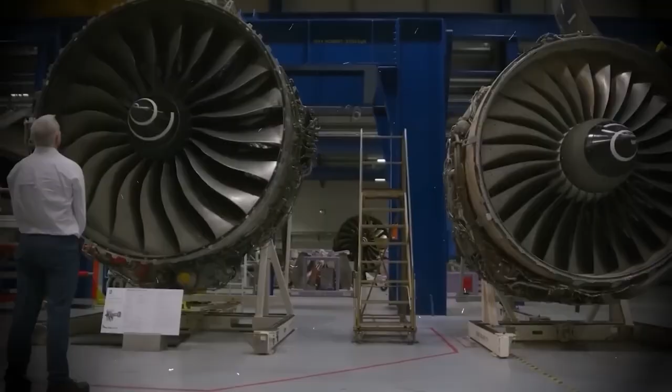Everyone thought this was the sign of a company slowly fading away, and they were completely wrong, because while the world stopped paying attention to Rolls-Royce, that was exactly when the company began the boldest project in its 120-year history. Not a minor upgrade, not a concept drawing meant to impress people, but a fully working prototype, a machine that had already been tested in the real world and had passed every test with results so shocking that the aviation industry had to sit down and read the numbers again and again just to make sure they were real.

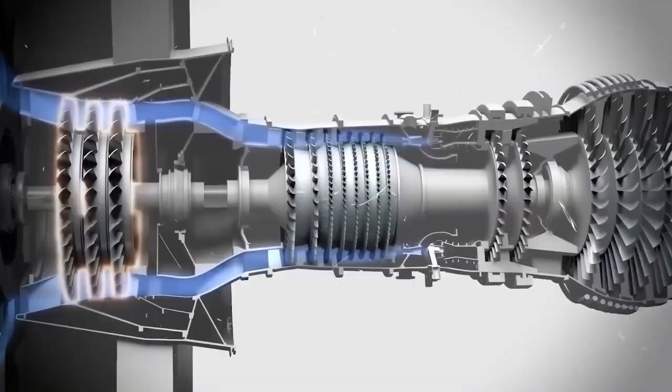They call it UltraFan, and that name was not chosen by accident. UltraFan is not just better than the previous generation of Rolls-Royce engines. It goes beyond almost everything commercial aviation has ever known. 25% better fuel efficiency, the largest fan ever fitted to a commercial aircraft engine, an advanced gearbox never before seen on an engine of this size. And most importantly, it has already been tested in real conditions with verifiable numbers, not just promises on paper.

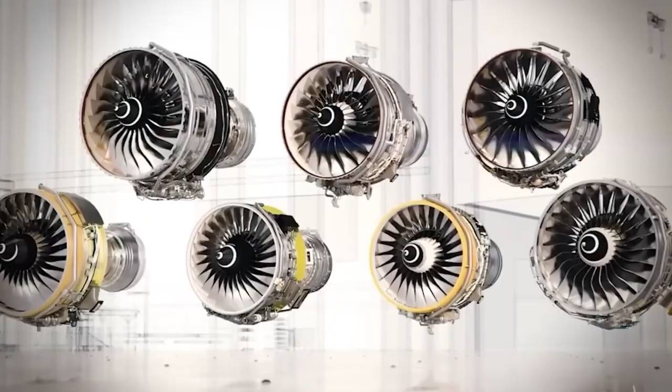But here's where the story gets really interesting. UltraFan is not just a more powerful engine, it is a strategic statement, a direct strike at the future of the entire industry. A challenge aimed straight at GE, Boeing, and anyone who ever believed Rolls-Royce was finished.

So, what is hidden inside this machine that makes it so special? Why are the world's biggest airlines watching every new move from Rolls-Royce so closely? And is this really the turning point that could completely reshape the aviation industry, or just another big promise from a brand trying to make a comeback? That is what we are going to find out in today's video.

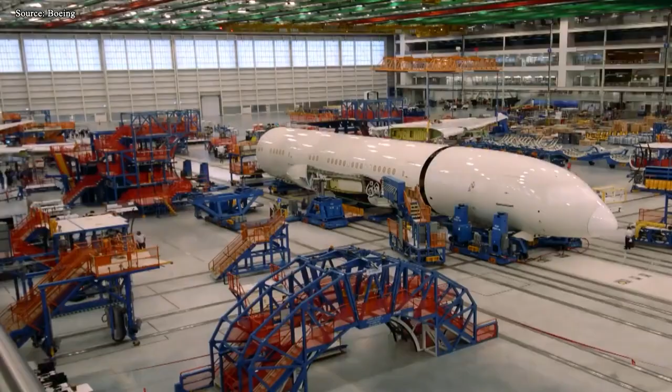In short, the entire economic structure of aviation is being shaken from the ground up. Engine technology from the previous decade, no matter how efficient it looked by the standards of its time, is becoming less and less suited to this new reality. And this is the exact gap Rolls-Royce is targeting. But to understand why that matters so much, we need to look directly at the heart of the story, the machine everyone is talking about.

What is UltraFan, and why are engineers so impressed by it? Rolls-Royce UltraFan is the result of 4 decades of accumulated research. But do not get it wrong. This is not just a step-by-step evolution of the earlier Trent family. This is a completely new design, built from the ground up with an entirely different philosophy.

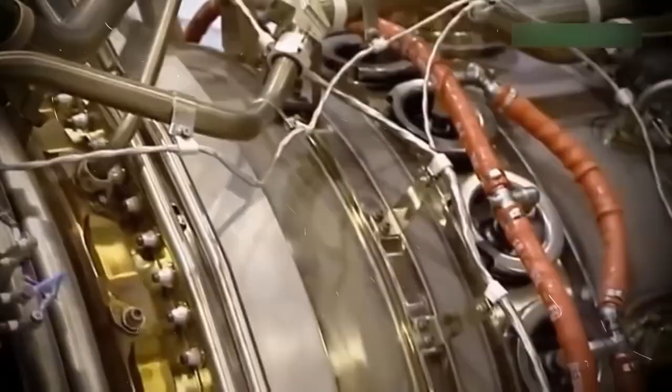Let's start with the first thing you notice, the enormous fan at the front. UltraFan's fan has a diameter of 140 inches, about 3.56 meters. It is the largest fan ever built for a commercial aircraft engine in history. But size is not the only thing that makes it special. What really matters is how it is made.

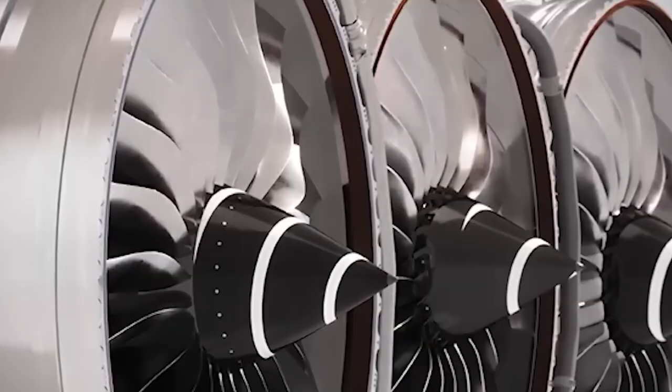Each fan blade is made from carbon composite material, which is much lighter than titanium. But to survive impact, for example, if a bird accidentally flies into the engine at high speed, the leading edge of each blade is reinforced with titanium. The result is a blade that is light, strong, and flexible enough not to shatter when something unexpected happens. In aerospace engineering, this is what people call a win-win, rare, but when it happens, it is worth paying attention to.

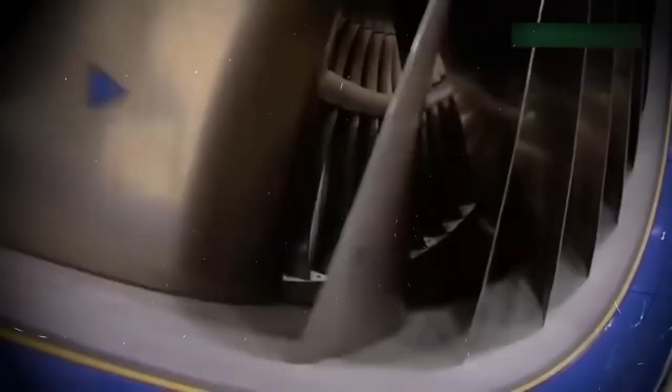Next comes the bypass ratio, a technical term, but an extremely important one. Imagine it this way. In a jet engine, not all the air passes through the engine core and gets burned. A large amount of air bypasses the core and creates thrust by being accelerated directly through the fan. That air is called bypass air. The higher the bypass ratio, the more efficient the engine becomes, and the quieter it usually is.

UltraFan reaches a bypass ratio above 15:1. That number has never been seen before in a large commercial aircraft engine. For comparison, the best modern engines today are around 9:1 or 11:1. Rolls-Royce has pushed far beyond that limit.

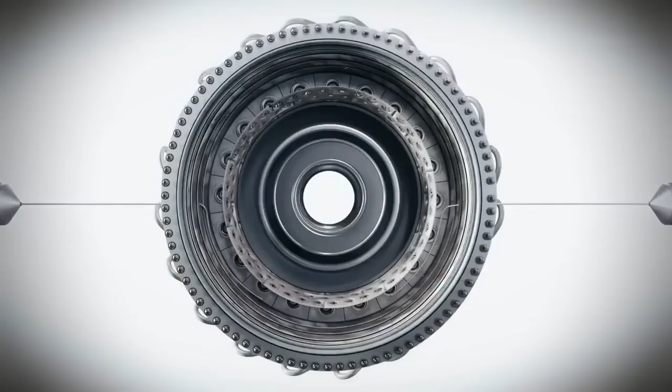But the most impressive number in this entire story is not the fan size, and it is not the bypass ratio. It is 64 megawatts. That is the amount of power UltraFan's central gearbox successfully handled during testing. 64 megawatts through a single gearbox, a world record, recorded and verified under real-world conditions. To make that easier to understand, that is roughly equivalent to the power of 85,000 standard cars being pushed through a drivetrain about the size of a small truck.

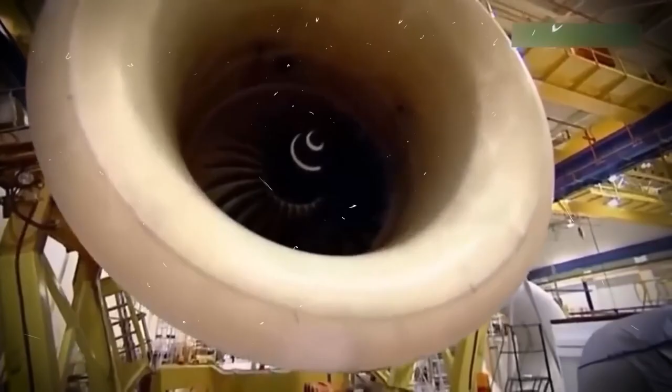This gearbox is the soul of UltraFan. It allows the fan and the turbine to spin at their own optimal speeds instead of forcing both of them to rotate at one compromised speed. It is like the difference between a car with only one gear and a car with a multi-speed automatic transmission. Efficiency improves dramatically across all flight conditions.

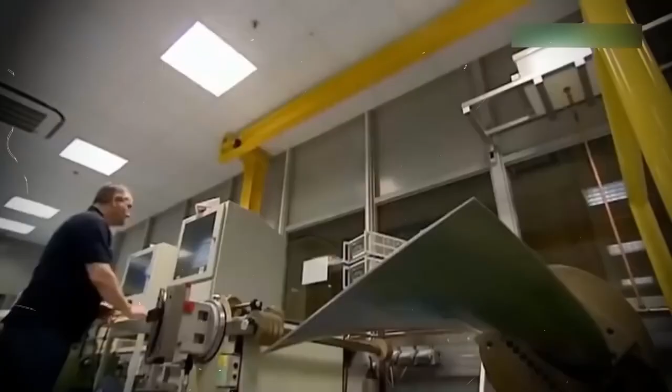And finally, inside the engine core, where temperature and pressure reach the limits of physics, Rolls-Royce uses ceramic matrix composite material, also known as CMC. This material can withstand temperatures far beyond what traditional metal alloys can handle. That means the engine core can operate at higher temperatures, produce better thermal efficiency, and reduce fuel consumption even further. CMC is also lighter and more durable over time, which helps reduce maintenance frequency.

None of this is just theory. It has been tested, it has been verified. UltraFan is a real working prototype, not just a demonstration model. At first, these may sound like interesting technical improvements, but the combination of all these technologies is what could change the entire game, and here is why.

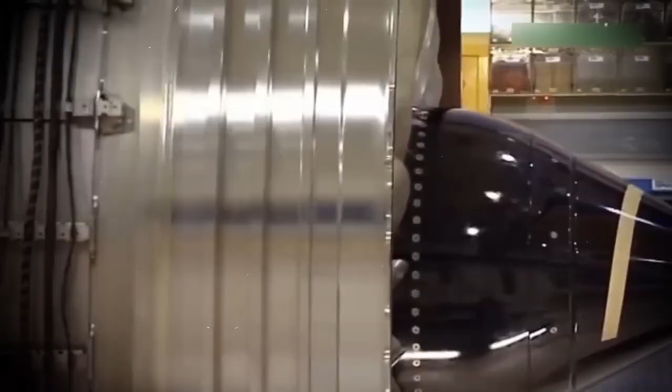The real breakthrough is not technical, it is economic. When engineers talk about UltraFan, they talk about bypass ratio and CMC. But when airline executives sit in a boardroom and ask questions about UltraFan, they only want to know one thing. Is that number real? That number is 25%.

UltraFan delivers 25% better fuel efficiency compared with the Trent XWB, currently the most efficient engine in Rolls-Royce's commercial portfolio and widely considered one of the most efficient engines in the world. This is not a comparison against an engine from 30 years ago. This is 25% better than one of the best engines available today.

Now turn that number into money. An Airbus A350 flies about 3,500 hours per year on long-haul routes. Average fuel costs for this type of aircraft are around $15 to $20 million per year, depending on fuel prices and route structure. If UltraFan reduces that cost by 25%, that means a saving of around $3.75 million to $5 million per aircraft per year.

A major airline operating 100 long-haul aircraft? Now we are talking about savings of up to $500 million a year from fuel alone, and that is only the starting point.

Ultrafan's modular design means fewer exclusive components, shorter maintenance time, and lower spare parts inventory costs. Better control of operating temperatures means less wear and tear, extending the time between major overhauls. Built-in predictive analytics can detect potential problems before they become failures, reducing expensive unscheduled maintenance, reducing canceled flights, and reducing passenger compensation.

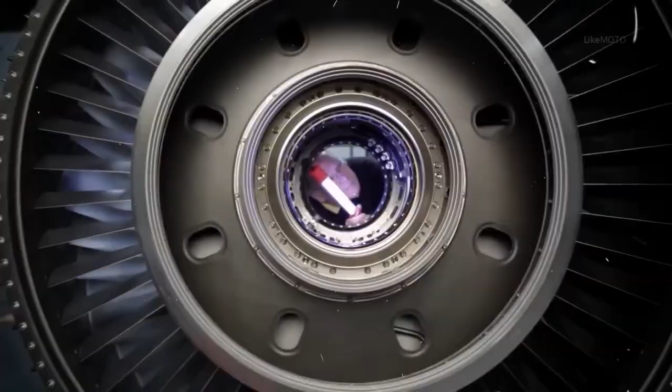Then comes carbon tax. The European Union has already started charging for carbon emissions from flights. An aircraft that burns less fuel produces fewer emissions, which means lower taxes. As this policy spreads, and current trends strongly suggest it will, more efficient engines will not just be a competitive advantage, they will become a survival requirement.

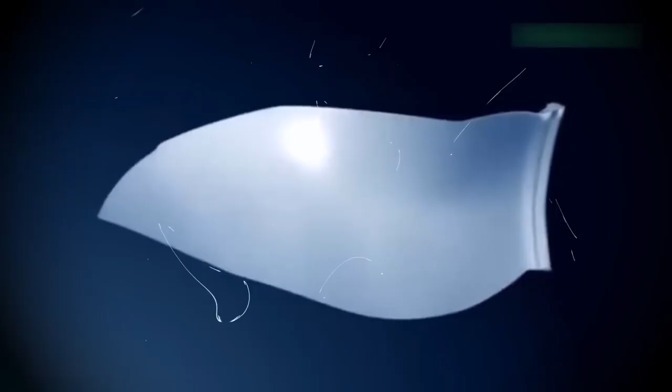And do not forget the noise factor. Airports like Amsterdam, London Heathrow, Frankfurt, and Tokyo Haneda are tightening noise restrictions. Louder aircraft lose nighttime slots. Losing nighttime slots means airlines cannot fully use the earning power of certain routes. Ultrafan, with the highest bypass ratio ever achieved and a low-speed fan design, is one of the quietest engines ever tested. That opens the door to more airports, more slots, and more revenue.

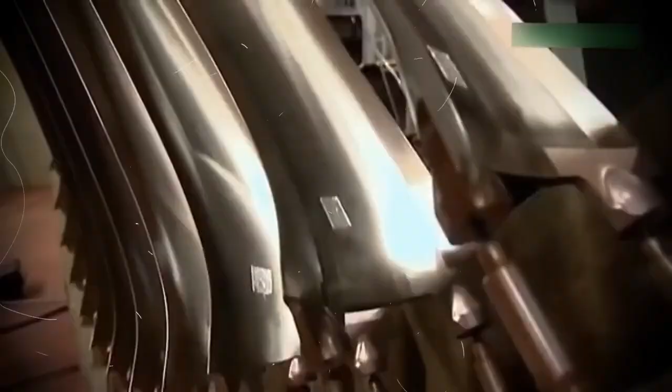When you look at the full picture, Ultrafan is not just an engineering achievement, it is a financial tool, a competitive weapon, and an insurance policy against increasingly strict regulations. Airlines understand this, and that is why the industry conversation is changing. But no matter how good a technology is, it cannot sell itself. And Rolls-Royce understands that if you want to change an industry, you need more than a superior product. You need the right alliances.

Challenges and unanswered questions. At this point, if you think this story is just unlimited praise for Rolls-Royce, we need to stop and look at reality. Because Ultrafan is still facing serious challenges, and ignoring them would not be honest. The first challenge is time. Rolls-Royce announced the Ultrafan program back in 2014. The most recent prototype testing took place in 2023, but so far, no airline has signed a direct commercial order for Ultrafan.

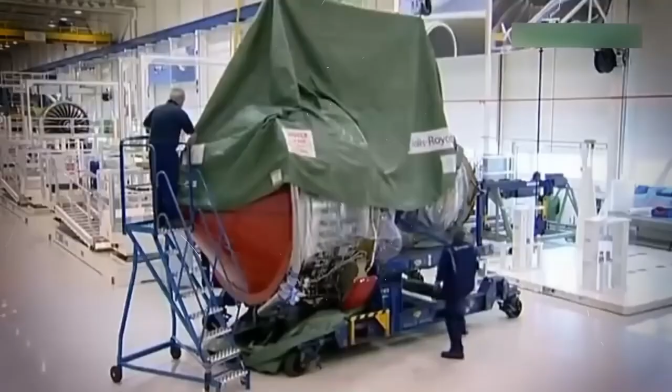In aviation, the gap between a successful working prototype and mass production can take many years, sometimes a full decade. Airbus has worked with Rolls-Royce to integrate Ultrafan into future propulsion systems, but which aircraft will use it first is still not completely clear. The next-generation airframe, the aircraft designed from day one to take full advantage of the Ultrafan architecture, has not been finalized. That means the supply chain, production facilities, and FAA and EASA certification processes are still ahead.

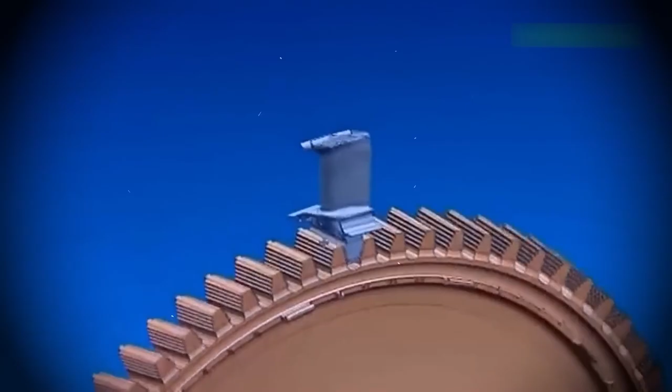The second challenge is cost. CMC, carbon composite, a 64-megawatt gearbox. These materials and components are not cheap to produce at scale. The initial price of an Ultrafan engine will most likely be significantly higher than current options. For airlines still struggling to recover after the pandemic, the upfront investment is a real barrier, even if the long-term benefits are clear.

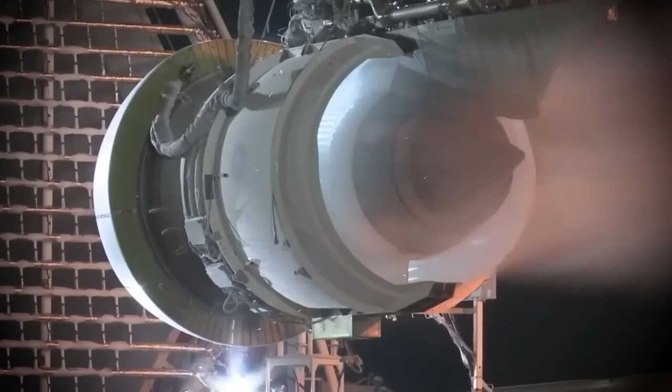The third challenge, and maybe the most subtle one, is industry inertia. Aviation is not a place that changes quickly. Every aircraft and engine purchasing decision is tied to maintenance contracts that can last 20 to 30 years. Airlines that have already invested in LEAP or GEnx fleets have no immediate reason to switch, even if something better appears on the market. Change in aviation happens by aircraft generation, not by financial quarter.

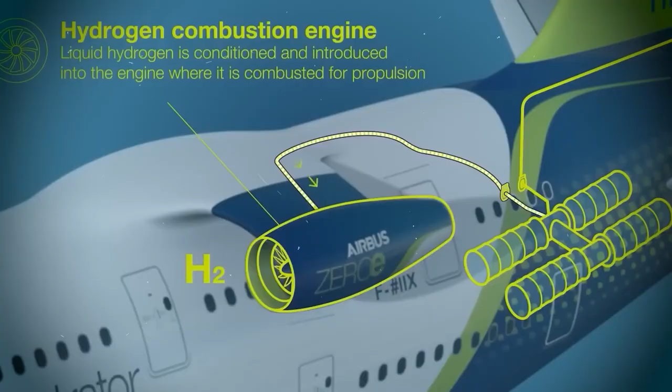And finally, there's a question no one has answered completely. Is Ultrafan truly ready for large-scale production within this decade? Prototype testing is an achievement. Producing thousands of reliable engines at a competitive cost is a completely different challenge. Rolls-Royce understands all of this, and its answer is the alliance strategy we're about to talk about now. This is where the race becomes truly intense, because Rolls-Royce is not fighting alone, and its rivals are not standing still either.

The engine war: GE9X, LEAP, and an order being overturned. To truly understand Ultrafan's position in the bigger picture, we need to look at its competitors. The strongest rival right now is the GE9X, an engine designed specifically for the Boeing 777X. The most impressive number behind the GE9X is thrust. 134,000 pounds of thrust, setting a world record. This is pure muscle, optimized for one purpose: pushing one of the world's largest aircraft into the sky with as much thrust as possible.

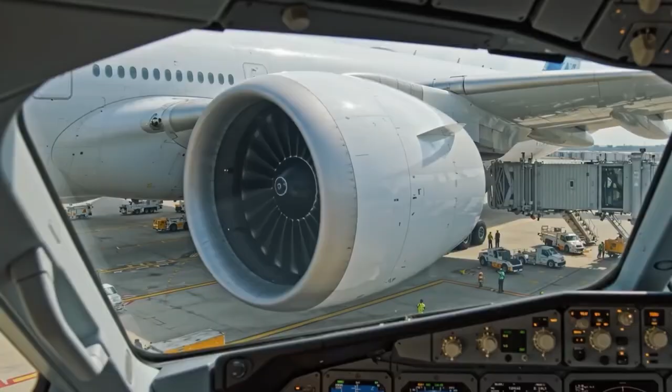But the GE9X has a structural problem that even GE cannot ignore. It is tied to a single aircraft. The 777X is the customer for the GE9X, and the 777X is years behind schedule. Commercial certification has been delayed again and again. Some airlines have cut back their orders. That means the GE9X, even though it is technically impressive, is tied to the fate of an aircraft program that is struggling.

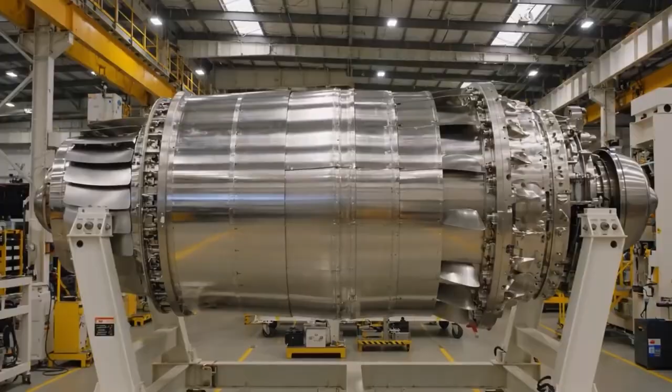The second rival is the LEAP family, a partnership between GE and Safran, used on the Boeing 737 MAX and Airbus A320neo. LEAP is selling very well, with thousands of orders. But LEAP is an engine for the current generation, not the next one. It does not have a gearbox architecture like UltraFan, and it does not have the same ability to integrate with hydrogen or hybrid electric systems. This is where Rolls-Royce's strategy becomes sharp.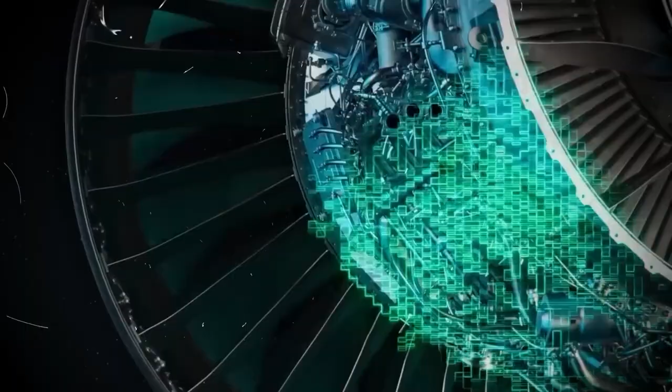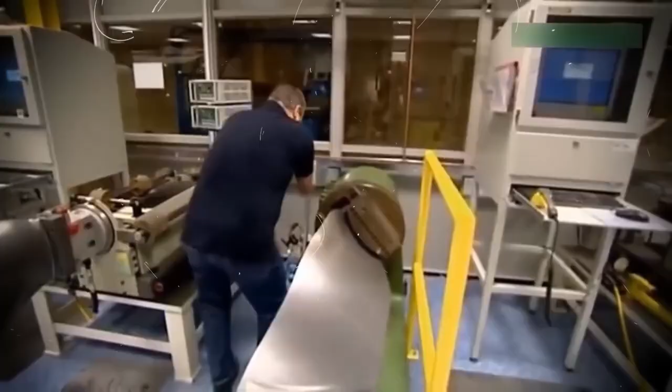In 2018, Rolls-Royce signed a partnership agreement with Airbus, co-funded by the European Union's Clean Sky 2 research program, a multi-billion euro initiative aimed at reducing aviation emissions. The goal was not simply to test UltraFan as a standalone engine, but to develop it as a complete integrated propulsion system where the engine, the mounting pylon, and the aerodynamic nacelle are designed together and optimized together instead of being developed separately. This is systems thinking, not just product thinking. And Airbus is betting on that for its next generation of aircraft.

What Boeing does not have in this equation is worth noticing. While Airbus and Rolls-Royce are building a future architecture together, Boeing is still largely relying on traditional relationships with GE and a technology roadmap that has not been clearly defined. The 777X is delayed. The 737 MAX is still recovering from crisis, and the new midsize airplane project, also known as NMA, has been frozen indefinitely.

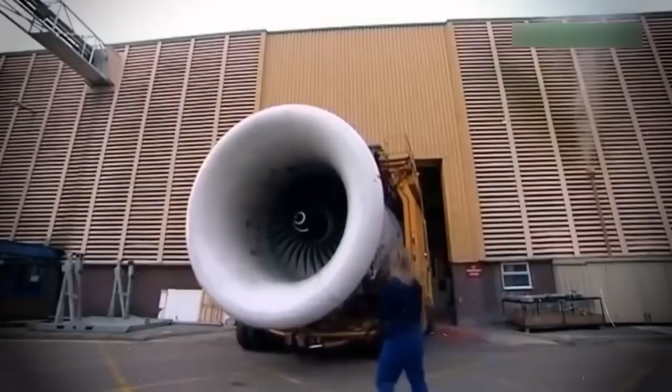But to be fair, GE is not sitting still. It is developing the CFM RISE engine family, Revolutionary Innovation for Sustainable Engines, together with Safran, targeting a 20% efficiency improvement over LEAP. That program is also testing an open fan architecture, an even more radical design that could challenge UltraFan's fuel efficiency in the future. So this is not a simple two-sided race. It is a multi-dimensional competition, and no one can say for sure who will reach the next generation finish line first.

So in the end, the biggest question remains. In such a fierce competitive landscape, does UltraFan have enough power to create real change, or is it just another name in an already crowded race? The future is being written by decisions made today.

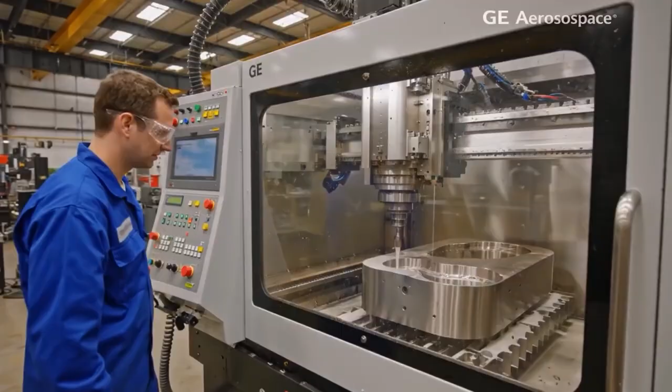Now let's look ahead. Not next year, but 10 to 20 years from now. By 2035, analysts expect most major economies to have mandatory carbon pricing systems directly applied to aviation. In some regions, this is already happening. Once carbon costs become a fixed part of every airline's financial calculations, engines that burn less fuel are no longer just nice to have. They become necessary to protect profit margins.

Sustainable aviation fuel, or SAF, is already being deployed, but it is still more expensive than conventional jet fuel. However, as SAF production scales up and costs come down, engines that are compatible with 100% SAF, like UltraFan is designed to be from the beginning, will become the natural choice. No major adjustment, no need for recertification.

Further ahead is hydrogen. Airbus has announced its ZEROe program, targeting commercial hydrogen aircraft by the year 2035. Rolls-Royce, through UltraFan's modular architecture, has designed this system to be compatible with future hydrogen combustion. That does not mean UltraFan will fly on hydrogen tomorrow, but it does mean the architecture is ready to evolve when hydrogen storage technology becomes mature enough.

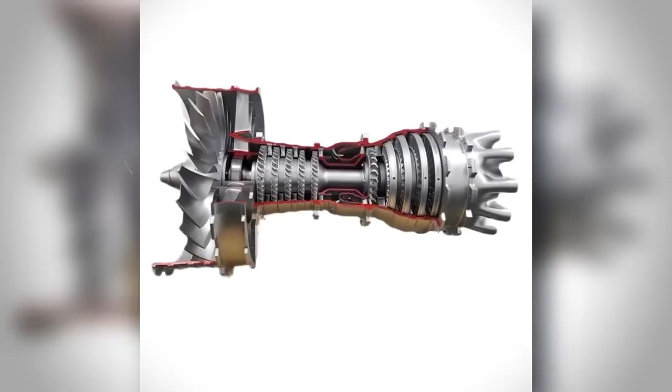And here's the deepest strategic point in the entire story. UltraFan is not just a product, it is a platform. Its modular architecture allows the same basic core to be adapted for different thrust levels, from narrow-body aircraft like the A320 family to wide-body aircraft like the A350 and future models. That means an airline could operate multiple aircraft types with the same technical system, the same maintenance team, and the same spare parts inventory. This is what fleet planners call fleet commonality, and it can save major airlines tens of millions of dollars every year.

For consumers, the impact is not small either. Quieter and more efficient aircraft with lower operating costs eventually mean airlines can keep ticket prices more competitive as operating expenses rise. Long-haul routes to smaller airports, which used to be economically difficult, could become realistic with an engine this fuel efficient.

For the entire industrial ecosystem, UltraFan sets a new benchmark. GE will have to accelerate CFM RISE. Pratt & Whitney will have to rethink its GTF roadmap. Safran will have to find a way to close the modularity gap. The entire race will speed up, and in the end, that is good for everyone. Rolls-Royce is not just building an engine, it is building leverage to change the rules of the entire industry.

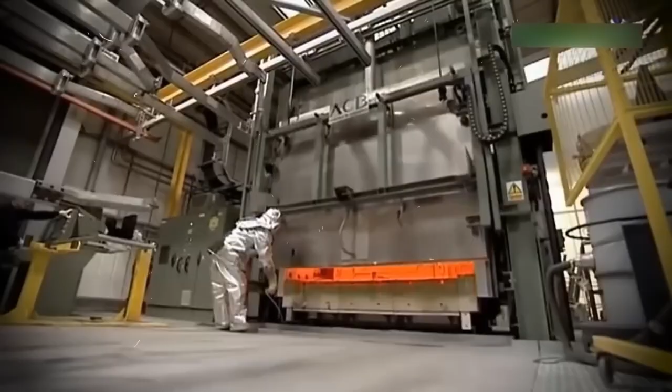Looking back at this whole story, one thing becomes clearer than ever. This is not a story about an aircraft engine. This is a story about what happens when an old and established organization decides not to compete under the old rules, but to sit down and rewrite the rules. Rolls-Royce, during the years when it seemed the quietest, did exactly that. It did not try to regain market share by making something slightly better than what already existed. It made a bet that the future of aviation would not be defined by who has the strongest engine, but by who has the most flexible, efficient, and sustainable ecosystem.

And with UltraFan, that argument is starting to carry real weight. But, and this is important to remember, the future has not been fully written yet. UltraFan still needs full certification. Large-scale production is still an unknown. Airbus needs to decide exactly which aircraft will become the first home for this engine.

GE is striking back with CFM Rise. And the market, as history has shown again and again, does not always reward the best technology. Sometimes it rewards the one that arrives at the right time, with the right partner, at exactly the right moment. Rolls-Royce is trying to be all three at once.

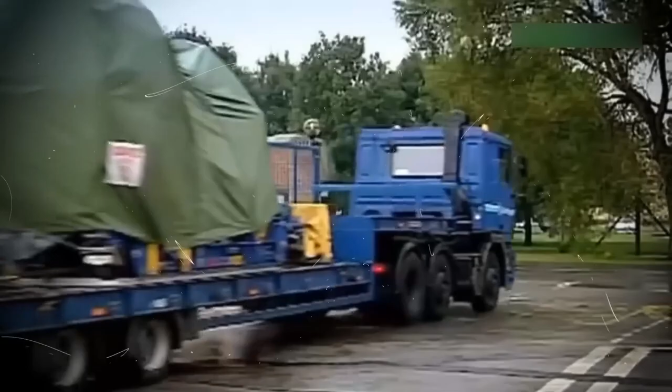So the final question, and maybe the most important one, is not, is UltraFan the best engine in the world? The technical numbers already give us a pretty clear answer to that. The real question is, is the aviation industry ready to change fast enough to embrace it?

And over the next decade, the answer to that question could reshape everything from airline balance sheets to the ticket prices you pay, to the amount of carbon released into the atmosphere every time an aircraft leaves the runway. This is one of the most important races in modern industrial history, and it is happening right now, almost completely under the public radar.

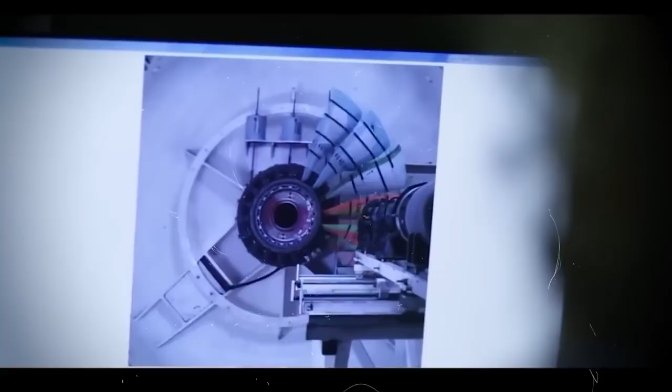So, what do you think? Is UltraFan truly a turning point, or will aviation keep being held back by the inertia of old contracts and legacy systems? Rolls-Royce has already started the journey, but will it actually reach the finish line?

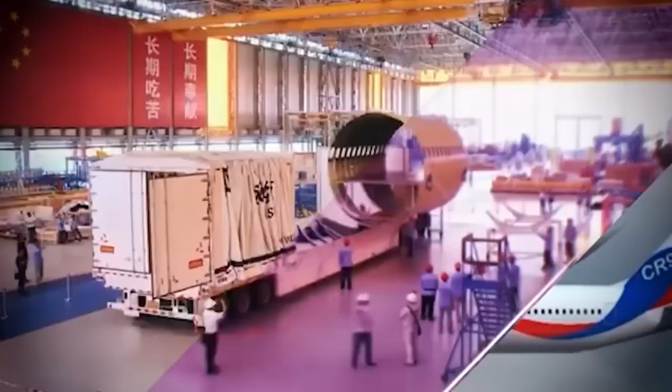Have you ever wondered what would happen if one night you woke up and everything you had always believed was untouchable in the global commercial aviation industry suddenly started falling apart? Not because of an accident, not because of a financial crisis, but because of one aircraft, an aircraft that much of the Western world once treated like a joke, had just completed a 12,000-kilometer journey without a single incident.

That aircraft is China's C-929, and that test flight did not come with fireworks, a massive press conference, Hollywood celebrities, or some dramatic countdown. It was just one airplane taking off quietly and landing in a completely different world.

For decades, people believed that the long-haul, wide-body aircraft market, the kind of aircraft that flies from New York to Tokyo, from Los Angeles to Dubai, belonged to only two giants, Boeing and Airbus. Nobody could touch that territory. The research costs were too massive, engine technology was too complicated, the international certification process was too long. But everything is changing, and it is changing much faster than most people expected.

So what allowed a country that once depended almost completely on Western engines to design, build, and test fly a world-class long-range aircraft on its own? Is this really an existential threat to Boeing, or is it just a geopolitical show? And most importantly, if the C-929 receives commercial flight certification, what will the global aviation market look like? Let's find out together.

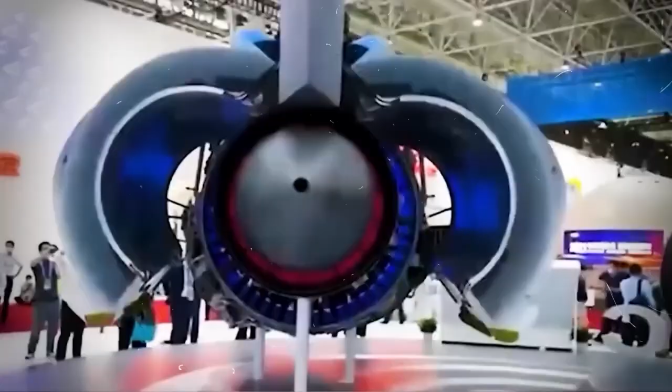Every major airline in the world, from Delta, United and American Airlines to Emirates, Singapore Airlines, and Cathay Pacific, has had to choose between those two options. There was no third choice. And the reason is simple. Building a wide-body aircraft is not a normal engineering project.

It requires tens of billions of dollars in research and development, advanced composite material technology, specialized engine systems, and most importantly, trust from international aviation certification agencies like the FAA in the United States or EASA in Europe. Even advanced economies like Japan have failed.

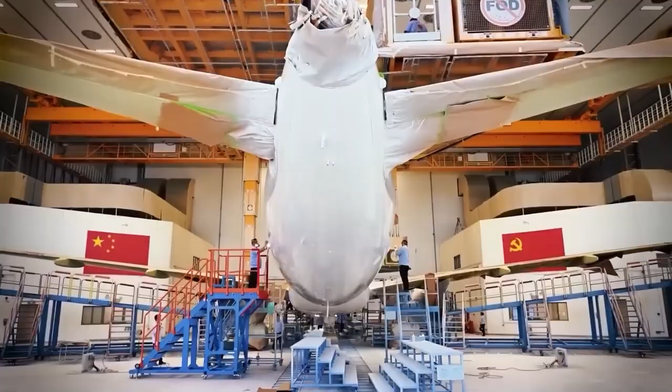Mitsubishi SpaceJet, a project that took decades and billions of dollars in investment, was finally canceled in 2023 without ever completing commercial certification. Canada's Bombardier had to sell its C-Series aircraft business to Airbus. Brazil's Embraer has only been able to focus on short-range and medium-range aircraft.

Long-haul, wide-body aircraft, that was untouchable territory. Or at least, that is what people used to think. The Boeing 787 Dreamliner and the Airbus A350 are the two symbols that dominate that segment.

They can fly non-stop from the east coast of the United States to Asia, carry 250 to 350 passengers, burn up to 25% less fuel than the previous generation, and offer cabins comfortable enough for passengers to survive 14 to 16 hours in the air.

But even those high points have cracks. Boeing is struggling with a production quality crisis. FAA investigations after the 737 MAX crashes and the Alaska Airlines door plug blowout incident in early 2024 threw both Boeing's brand and its supply chain into chaos. Deliveries slowed down, costs climbed, and customer trust started to fracture. That is the backdrop. And in that backdrop, China made its move.

But to understand why this matters so much, we need to look at the core of the whole story, the story of how a broken alliance became the catalyst for one of the most ambitious aviation projects in history. The C-929 rose from the ashes of the CR-929. The year was 2016. While the world was watching Boeing roll out new 787 aircraft and Airbus expand its A350 production line, a signed document in Shanghai quietly laid the foundation for a revolution. China and Russia announced a partnership to develop a wide-body aircraft called the CR-929.

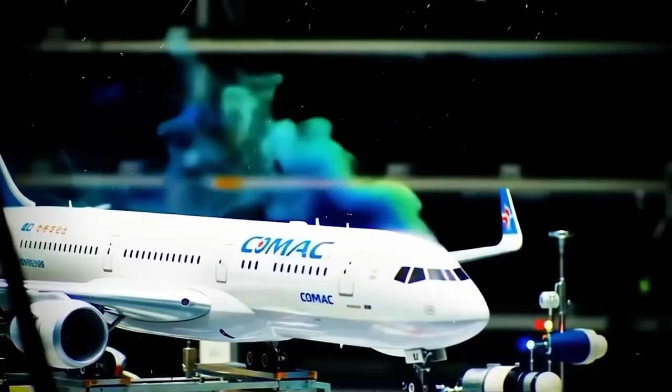The West paid attention. Boeing released an internal memo warning about threats from non-traditional players. Honeywell, GE, Safran, Western aviation suppliers quietly watched the project. Then, everything collapsed. In 2022, the war in Ukraine broke out. Western sanctions tightened around Russia like a noose. UAC was forced to focus its resources on military platforms. Key engineers were pulled away from the CR-929 project. Progress stalled. Emails went unanswered.

Parts stopped arriving. But the real breaking point did not come from politics, it came from power. China wanted access to Russia's proprietary engine technology, including advanced high-bypass fan designs. Russia refused. Intellectual property negotiations broke down. By the end of 2022, Russia pulled out of the project. The West breathed a sigh of relief. Aviation experts wrote obituaries for the CR-929, a victim of geopolitics, they said. Dead before it was born, aviation headlines declared. But nobody saw what was coming next.

China did not bury the project. It renamed it. The CR-929 became the C-929, and instead of scaling back, COMAC accelerated. They hired more people, poured in more money, and started replacing foreign components one by one with domestic solutions. Avionics systems were swapped out, the fuselage design was rebuilt from the ground up, the certification process was restructured to align with international protocols through the Civil Aviation Administration of China, the CAAC.

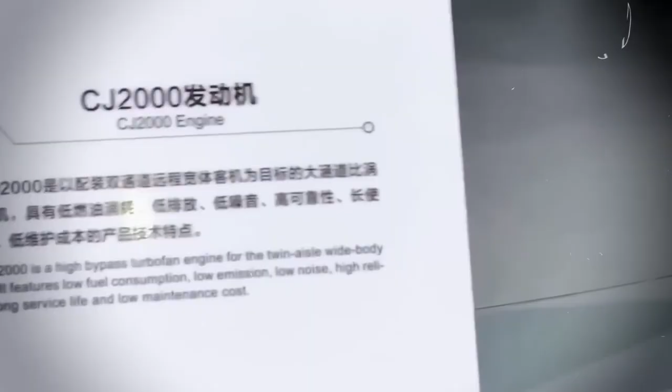By the end of 2023, the first flight test model was ready. That may sound simple, but this small detail could change the entire game. China is not just building an aircraft, it is building a completely independent aviation ecosystem. What is inside the C929 that has the whole industry worried? This is not just a stretched-out C919. This is not a cheap copy of the Dreamliner. The C929 is a completely new wide-body design built to compete directly with the Boeing 787 and the Airbus A350, not just in size, but also in technology, passenger comfort, and total operating cost.

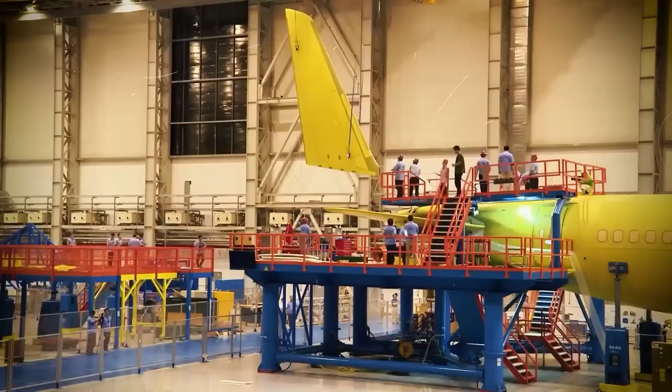Look at the numbers. The C929's wingspan stretches close to 65 meters, longer than the Dreamliner. Its cabin is more than 5.5 meters wide, giving airlines flexibility in seating layouts, from 9 abreast economy seating to premium business class cabins optimized for long-haul routes. But size is not the biggest headline. The materials are what make the whole industry look twice. More than 50% of the C929's airframe is made from carbon fiber composite materials, a dramatic leap from COMAC's earlier aircraft, and even slightly ahead of the A350. On top of that, about 15% titanium is used in key load-bearing areas. The result is an aircraft optimized for fuel efficiency, corrosion resistance, and durability on ultra-long-haul routes.

Inside that shell, things get even more interesting. The C929 is expected to feature intelligent avionics with adaptive digital flight displays, ambient cockpit lighting to reduce pilot stress, and a real-time system monitoring suite similar to what the Boeing 787 pioneered, but rumored to include expanded diagnostic bandwidth across hydraulic, electrical, and thermal systems. Translated into business language, airlines could get predictive maintenance capability and reduced unplanned downtime, two of the most painful cost problems in modern fleets. Then comes the cabin, and here, COMAC is not holding back.

Designers have focused heavily on the passenger experience, integrating noise reduction materials, adaptive LED lighting, and modular seating options. Leaked drawings show larger windows, wider aisles, and an interior layout inspired by the minimalist design of the A350 combined with Embraer-style ergonomic seat spacing.

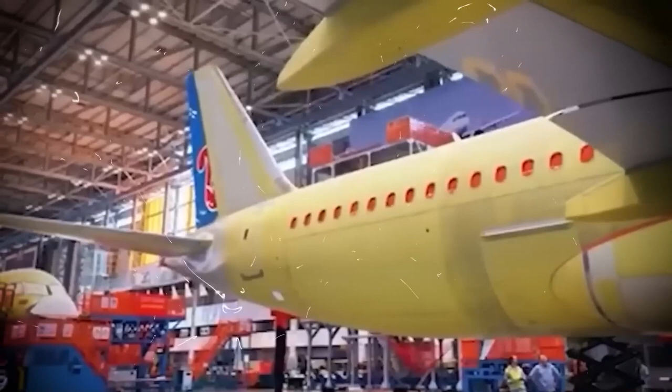And here is what makes all of this scary for Boeing and Airbus. This whole package of innovation is being offered at an estimated cost 15 to 20% lower than comparable Western products, especially for markets connected to the Belt and Road Initiative. This is not just an engineering win, it is an economic weapon.

There's one more detail people do not talk about enough. Final assembly takes place inside the Shanghai Pilot-Free Trade Zone, a facility that is both a production line and a geopolitical firewall. The zone gives Comac tax exemptions, faster import and export clearance, and most importantly, full control over data and intellectual property. No Western company can simply walk in and observe.

International oversight is minimal. The assembly line is embedded with Chinese-developed robotics rumored to include AI-assisted inspection systems that scan composite panels in real time for micro cracks and fatigue stress. Unlike Boeing's Everett factory, which depends heavily on legacy systems and layered outsourcing, Comac's production line is vertically integrated, fewer third parties, more in-house control.

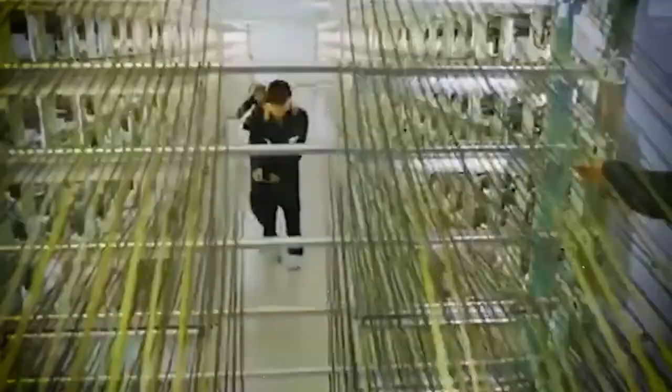One engineer from the Shanghai Aircraft Design and Research Institute, speaking anonymously, described the philosophy clearly. We learned from the Dreamliner delays. Every failure Boeing suffered, we studied and adapted. But no matter how impressive the technology looks, it means nothing if it cannot be produced at scale and if it does not have the heart to fly on its own. What the C929 still has not proven.

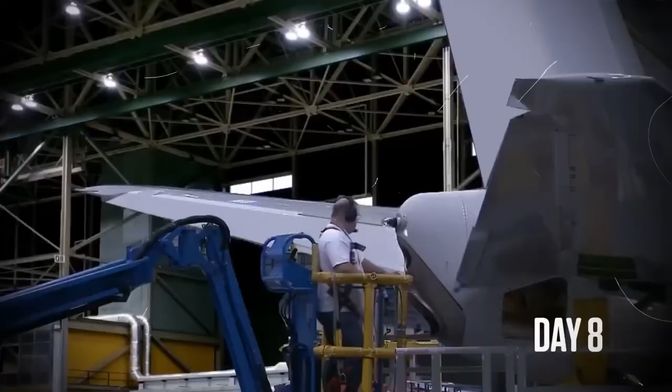But let's slow down for a second, because this story would not be honest if it were all sunshine. The C929 still faces enormous challenges, and the biggest one is something China has struggled with for decades: engines. Let's be direct. Engines have always been China's weak point. The C919, the narrow-body aircraft that Comac spent more than 15 years perfecting, still depends on the LEAP-1C engine, a product co-developed by General Electric and France's Safran.

That is exactly the kind of dependence that allows the United States to control access, restrict exports, and even delay certification progress. With the C929, China's trying to break that grip through the CJ2000 engine, a next-generation turbofan being developed by the Aero Engine Corporation of China, or AECC. According to insiders at AECC, the CJ2000 is designed to deliver up to 35 tons of thrust, putting it directly in the performance class of the Rolls-Royce Trent 1000 and GE GEnx, both of which power the Boeing 787.

On paper, the specifications sound impressive. A 3-meter fan diameter, an ultra-high bypass ratio for fuel savings, next-generation ceramic matrix composite materials to handle high turbine temperatures at a lower weight. But here is the reality. The CJ2000 is still in development.

Bench testing has started. Early prototypes of fan blades and compressor stages are reportedly showing efficiency indicators within 10% of GE's newest models. But within 10% in the jet engine business is not success, it is the starting line. A 10% efficiency gap can translate into millions of dollars in operating costs every year for each aircraft.

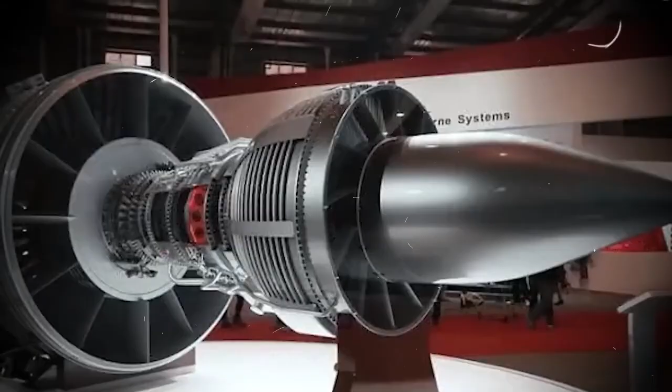Then there is the international certification problem. Even if China's CAAC certifies the C929 for domestic flights, the question is whether the FAA and EASA will certify it for international operations. And if they do not, then the C929 can only fly on routes where Chinese regulators have influence, which basically means China's domestic market and Belt and Road-aligned countries. That still sounds like a huge market, and it is. But it is not the kind of global domination some claims are suggesting.

And finally, there's the issue of passenger trust. The international aviation market does not buy aircraft based only on specifications. It buys based on safety records, after-sales service capability, and spare parts availability. COMAC has still not built a global service network that can compare with Boeing or Airbus. That is a massive commercial challenge that cannot be solved with state funding alone.

And this is where the race becomes even more intense, because this company is not the only one trying to dominate the future of the sky. Boeing, Airbus, and the C929. Who is really where? Let's put these three aircraft side by side and look straight at the truth. The Boeing 787 Dreamliner is still the gold standard of the wide-body segment.

It has a massive operating record, more than 1,000 aircraft in service around the world. Its after-sales service network reaches across 140 countries. Its systems integration technology has been proven through millions of commercial flight hours.

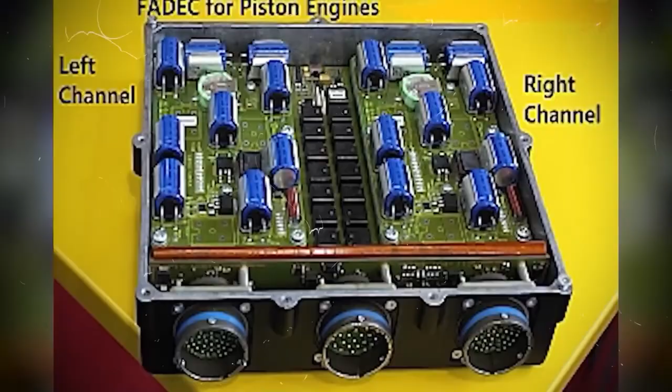The gap is widening. The Airbus A350 is seen as the smarter compromise. Excellent fuel efficiency, a spotless safety record, and Airbus's political flexibility as a European company less tied to United States-China trade disputes makes it more attractive to many airlines in emerging markets. But Airbus is not free from pressure either. Its supply chain is stretched, and it cannot ramp up production fast enough to meet post-pandemic demand recovery.

So what does the C929 look like in that context? If China really delivers what it is promising, a long-range, wide-body aircraft with 50% composite materials, total lifecycle cost 20% lower, and built-in state-backed financing, then this is not just a competitor. This is a structural alternative, but here's the important balance point. The C929 and the Boeing 787 may never compete directly in the same market. Not because the C929 is not good enough, but because the two aircraft may serve two different ecosystems.

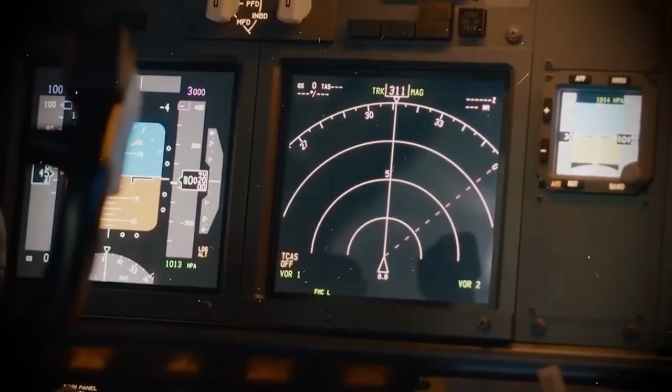Boeing continues to dominate North America, Western Europe, Japan, and South Korea, markets where FAA and EASA standards are the gold standard. The C929 could capture the rest of the world, Southeast Asia, South Asia, the Middle East, Africa, and Latin America, where infrastructure is still being built and purchasing decisions are less tied to Western geopolitics. And that is exactly what makes this competition not just an aircraft battle, but a systems war.

Imagine this scenario. A developing country receives a loan from a Chinese state bank to build a new airport terminal. The construction is handled by a Chinese contractor. The radar and air traffic control systems come from Huawei's Aviation division. And when it is time to bring in aircraft to fill those new runways, the airplane parked on the tarmac is the C929, purchased with Chinese state financing and bundled with below-market service packages.

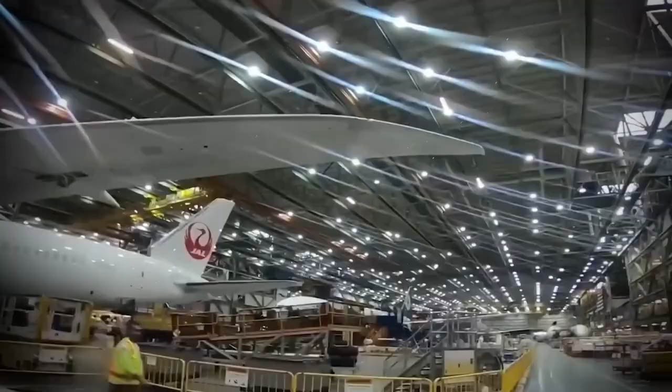That is not just an aircraft purchase. That is the creation of a strategic partnership poured in concrete and steel. And once that infrastructure is built, it is very hard to reverse. Internal reports from Beijing's Ministry of Commerce show that at least 8 countries, including Pakistan, Kenya, and Malaysia, have expressed early interest in buying or leasing C929 units once certification is complete.

So in the end, the biggest question remains: is this technology truly powerful enough to change the future of the sky? Let's move to the next part. What will the aviation world look like over the next 10 years? This is the part everybody wants to know, but few people are willing to say out loud. Let's start with the most likely scenario over the next 5 years.

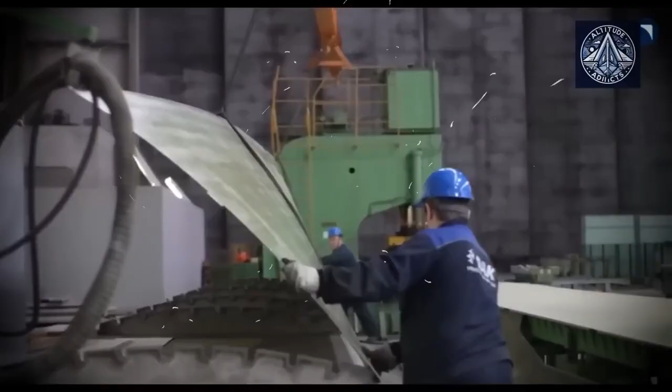If the CJ2000 falls behind schedule, which is entirely possible based on the history of commercial jet engine development, then the C929 will enter commercial service with a foreign or temporary engine, just like the C919 is currently using the LEAP-1C. That would significantly limit China's claim of being fully independent and give the West important leverage, but it would not stop the launch. Even in that scenario, the C929 could still create meaningful disruption in markets that do not require FAA certification. Southeast Asia, where ASEAN is one of the fastest-growing aviation markets in the world, could be the first battlefield.

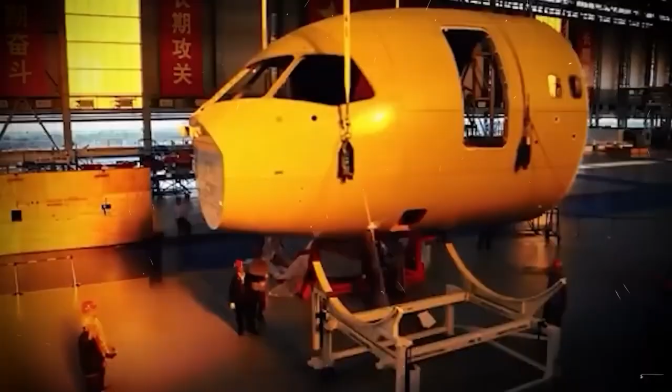Looking further ahead to 2030 through 2035, if China executes its roadmap, the CJ2000 gets certified, the C929 receives CAAC certification, and then begins seeking recognition from Asian and African regulators, the global picture will start changing in more fundamental ways. Boeing would see its market share shrink in the Asia-Pacific region. Airbus may hold its position in Europe and the Middle East thanks to diplomatic advantages, but it would still face pricing pressure. And airlines in emerging markets, which have long had to accept whatever Boeing or Airbus offered because there was no other real option, would suddenly have a genuine third choice.

But the impact does not stop with aircraft. If the C929 succeeds, it will create the next wave. The CJ2000 engine, if certified, would open the door to dozens of other applications. China's carbon fiber composite supply chain would grow to the point where it could compete with Japan's Toray and America's Hexcel, currently 2 of the largest aerospace composite material suppliers in the world.

The accumulated knowledge from the C-929 would be applied to the next generation of aircraft. And here is the most important part for viewers watching from the United States. This competition does not just mean plane tickets might become cheaper. It means the balance of power in global aviation, an industry worth nearly $1 trillion, is starting to shift. And when aviation power shifts, it pulls commercial power, diplomatic influence, and ultimately geopolitics along with it.

That is why a 12,000-kilometer test flight with no fireworks and no Hollywood-style launch matters more than any show. Because it is not a promise, it is proof, and proof changes everything. As for Boeing, the company is in one of the most difficult moments in its history. New CEO Kelly Ortberg is taking over a ship under pressure from every side: the FAA, airline customers, investors, and now a new competitor from the East. This is not a good moment to be weak while facing a strategic challenge on the scale of the C-929.

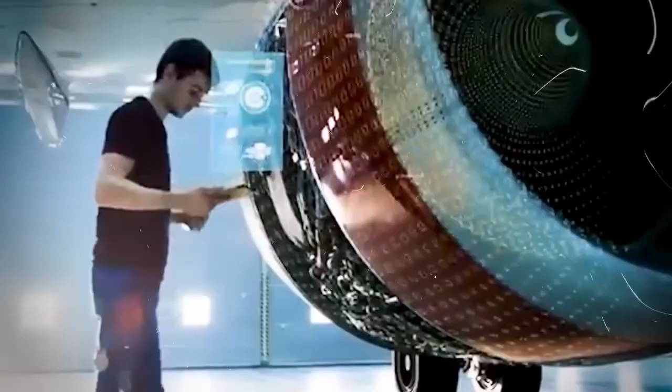One Western analyst summed it up very clearly. If the C-929 gets certified and reaches even moderate fuel efficiency, Boeing's dominance in the Asia-Pacific will end. Airbus has more diplomatic advantage, but even Airbus cannot compete with a $150 million aircraft that comes bundled with an airport upgrade package and 20-year financing. So where do we stand in this bigger story?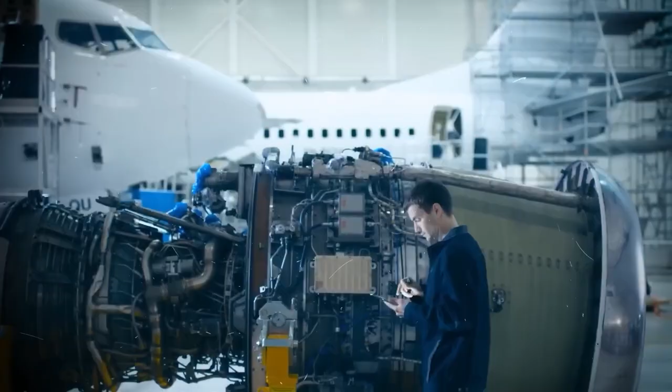The C-929 is not a silver bullet. It still has many challenges to overcome: the engine is not ready, international certification is uncertain, and the after-sales service network is not mature enough. Anyone who thinks Boeing and Airbus will collapse after one 12,000-kilometer test flight does not understand how the commercial aviation industry works. But this is clearer than ever. The race has begun, and this time, there is a real challenger.

China has proven something many people once doubted, that a country can build a long-haul wide-body aircraft without Western permission. That changes the psychology of the entire industry. And in business, psychology often leads reality. The question is no longer whether the C-929 can fly. The question now is, who will sit on it, who will operate it, and who will shape the rules of the sky over the next 30 years? That is the question Boeing, Airbus, Washington, Brussels, and Beijing are all trying to answer, and nobody is completely sure.

What do you think? Is the C-929 really an existential threat to Boeing, or is it just an important geopolitical step that still is not enough to flip the whole game?

But in early 2025, a technical report landed on the desks of analysts in Europe and the United States. And according to people familiar with the situation, the reaction inside companies like Boeing and Airbus was anything but calm. Because this was not some symbolic test. It was the clearest signal yet that China, through an engine called the CJ1000A, may be much further ahead than the world once believed. So, where does the CJ1000A really stand in this race? And if it succeeds, what could it change in the balance of power across the global aviation industry?

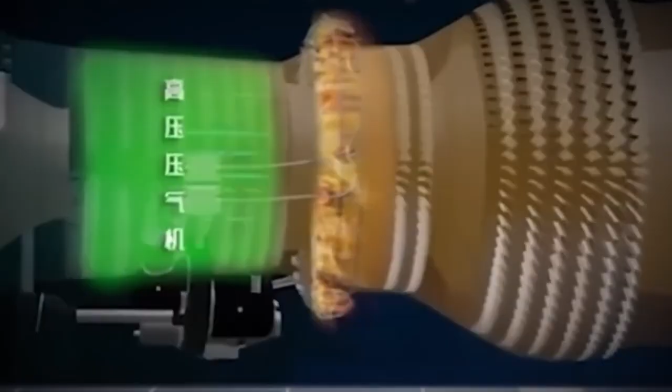To understand why this engine matters so much, you have to look back at the dangerous gap China has been forced to live with for years. China built the C-919, its first domestically developed narrow-body airliner and a direct rival to the Airbus A320neo and Boeing 737 MAX. That alone was a major engineering achievement. But there was one detail Chinese officials were never comfortable talking about. Every C-919 flying today depends on the LEAP-1C engine, a joint product of America's GE Aviation and France's Safran, a made-in-China airplane powered by a foreign heart.

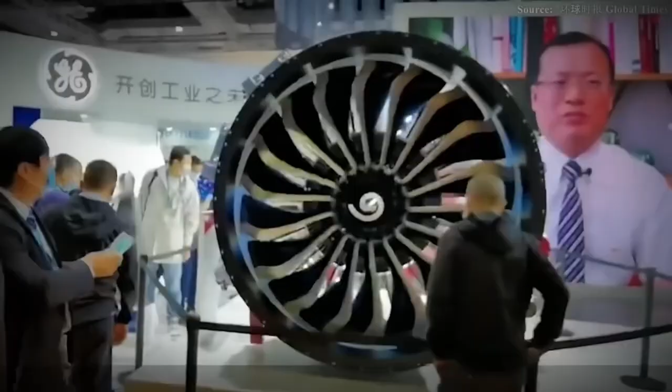And the problem was never just national pride. The real issue is simple. Whoever controls the engine controls the entire program, and that has been proven in reality, not theory. In 2020, Washington considered blocking LEAP engine deliveries to China. Then, in 2025, the United States once again paused export approvals. The effect was almost immediate. No missiles, no sanctions package.

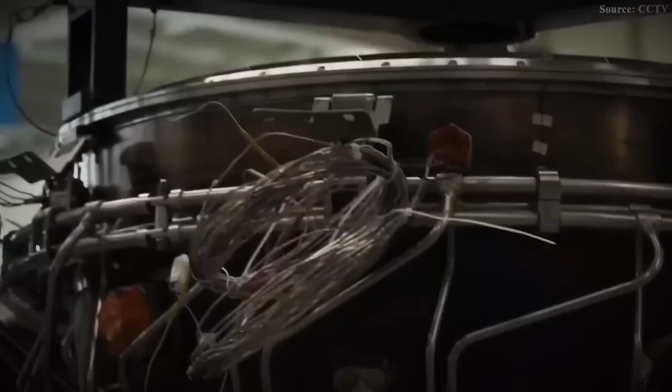Just one administrative decision. The C919 assembly line had to slow down. Deliveries that airlines were waiting for suddenly stopped moving. COMAC's plan to deliver more than 30 aircraft that year was cut to just 25. Four airlines that had already placed deposits had to push back their schedules. Pilots trained to fly the C919 were left waiting because there were no new aircraft available for them. That pause only lasted a few weeks before approvals were restored in early July.

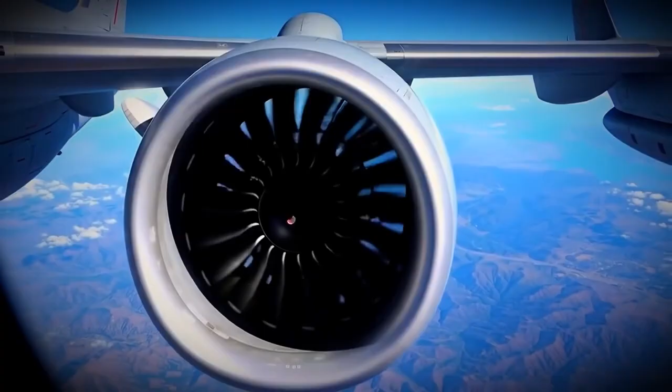But the real damage was not the number of delayed airplanes. It was the message the event sent. The C919 might look ready for the world, but it could still be switched off with one phone call from Washington. With China expected to need more than 9,500 new aircraft over the next 20 years, that is not the kind of risk any long-term strategist can accept. That is why the CJ1000A is no longer just a long-term research project. After 2025, it became a critical part of China's entire civil aviation strategy.

But to really understand this program, one thing needs to be clear. The road to the CJ1000A did not begin because of outside pressure. It began more than a decade ago, when engineers at AECC, the Aero Engine Corporation of China, were given the task of building something the country had never produced before. A high-bypass turbofan engine in the same class as the engines powering the A320neo and the 737 MAX. In 2011, a model of the CJ1000A appeared at the Beijing Air Show. At that point, it was mostly a statement of ambition.

Then, in 2017, the first full demonstration engine was assembled. It was not built to fly yet. It was built to answer one question: could China's engine core reach the speed and temperature needed for commercial aviation? In 2018, the answer came. Inside a test facility in Shanghai, the CJ1000A reached full core speed for the first time. That was the moment the program moved from drawings and concepts into real hardware.

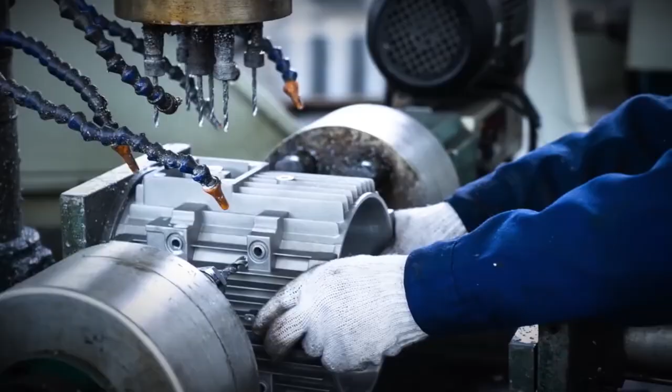At the same time, COMAC prepared for a major step forward. The CJ1000A would be mounted on a Xi'an Y-20 heavy military transport aircraft, replacing one of its 4 standard engines. That gave engineers a way to collect real flight data without risking a passenger airliner. Basically, it turned the Y-20 into a flying test laboratory. By 2023, pictures started showing up on Chinese social media of a Y-20 flying with the CJ1000A, replacing one of its original engines.

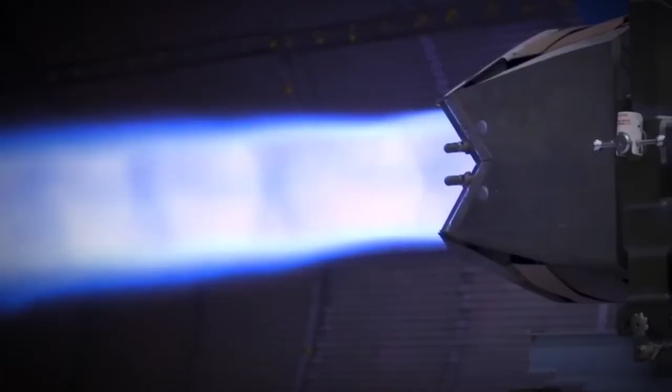The program had entered the stage where most engine projects start exposing fatal weaknesses: overheating, instability, or microscopic cracks that cannot be seen until it is already too late. But reports from inside the program did not point to those problems. The engine reportedly handled full thrust without major issues. It responded cleanly to throttle changes. A former deputy director at COMAC, someone who had watched the C919 struggle through delay after delay, said the CJ1000A was exceeding his most optimistic expectations. In an industry where caution is almost instinctive, that is a remarkable thing to say.

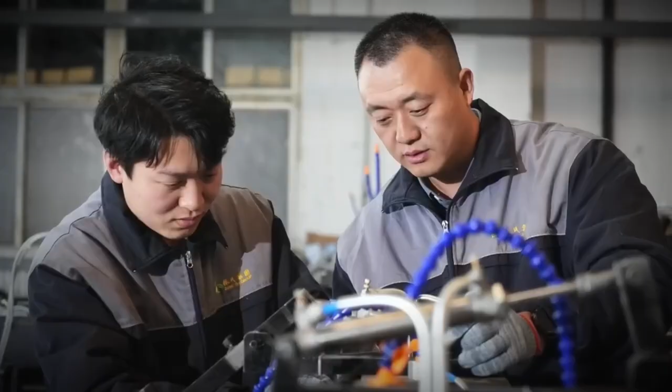That does not mean the CJ1000A is ready, but what matters more is where it now sits in the development cycle. To get a realistic picture, put it next to the engines that currently dominate the narrow-body aircraft market. The LEAP-1C, the engine currently powering the C919, uses ceramic matrix composite materials, advanced composite fan blades, and cooling systems that allow it to operate at much higher temperatures, cutting fuel consumption significantly. In the efficiency race, the LEAP is still ahead. It has more flight hours, more data, and more years of refinement that China simply cannot compress overnight.

But when it comes to thrust, the most important factor for replacing the current engine, the CJ1000A has already reached the range needed for the C919. Its overall architecture is similar in size and class. It cannot beat the LEAP in efficiency yet, but it is capable of doing the job. Compared with Pratt & Whitney's PW1100G, the geared turbofan known for its strong efficiency but also infamous for early reliability issues, the CJ1000A has one unexpected advantage: simplicity. There is no complex gearbox.

There is no risk of bearing wear that could force hundreds of aircraft to sit on the ground. Its early learning curve carries less risk. Of course, it also does not deliver the same efficiency level as the PW1100G, but that is not the goal.

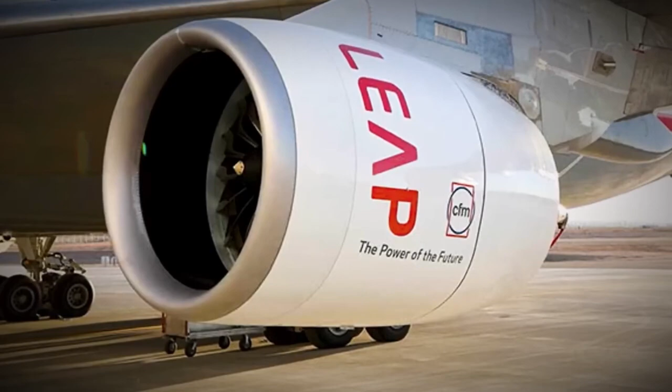Many analysts place the CJ1000 closest to the later generation of the CFM56, not in terms of material standards, but in terms of technical maturity and potential reliability. The CFM56 is one of the most proven engines in aviation history. Comparing the CJ1000A to it is not casual praise. It is a sign that the Chinese engine may have moved beyond the danger zone that most engine projects never escape. And that is exactly where the tone among Western analysts is beginning to change.

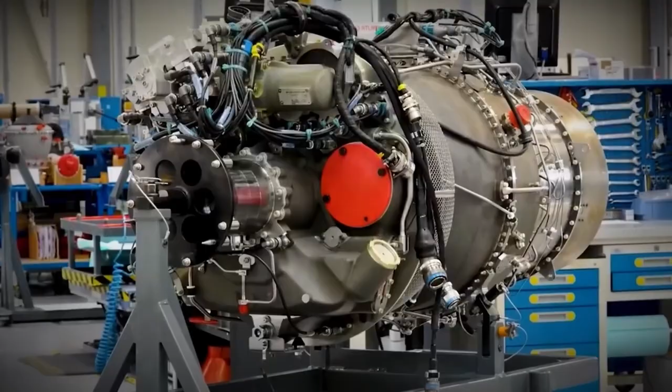For years, the common assumption was that China would run into hidden problems that nobody could see yet. The kind of problems that only show up after thousands of accumulated flight hours and push a program back by several more years. But the latest test data suggests the opposite. The CJ1000A does not appear to be stuck in the early danger zone. It appears to be moving beyond it. The next question is no longer whether the engine can run. The question is, what does that change?

If the CJ1000A receives commercial certification, something that still requires thousands of additional flight hours, teardown inspections after repeated operating cycles, and long-term durability testing, then the C919 becomes something completely different. It is no longer a made-in-China aircraft with a foreign heart. It becomes a complete product with an independent supply chain, protection from export pauses, and the ability to scale production at the pace Comac wants. Comac's long-term target of producing 100 to 200 aircraft per year no longer looks unrealistic, at least in the domestic market and in regions willing to accept Chinese certification.

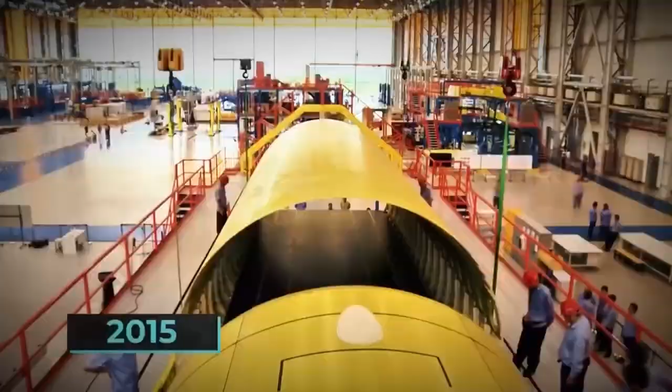But the bigger impact does not stop there. A working CJ1000A means China can build its own independent maintenance and parts ecosystem, the same kind of ecosystem Boeing and Airbus use to establish their dominance for decades. Countries across Southeast Asia, the Middle East, Africa, and Central Asia could buy C919 aircraft with CJ1000A engines without depending on any Western supplier. No trade leverage. No geopolitical pressure from Washington or Brussels.

For Boeing and Airbus, this is not an immediate threat. The C919 still needs years before it can receive EASA or FAA certification and enter the global market on a major scale. But the real concern is not today. It is the direction this is heading. If the first version is already this stable, then the second version will be better. The third will be more powerful. And by the fourth or fifth generation, the performance gap with the LEAP or the PW1100G, a gap that is still obvious today, could shrink to the point where it no longer matters commercially.

This mechanism is not new. It is exactly what happened with container ships, solar panels, lithium batteries, smartphones, and electric vehicles. China does not need to win in the first round. It only needs to enter the ring and stay there long enough to learn, improve, and scale. Maybe the most important part of this entire story is not what the CJ1000A can do today, but what it is getting ready to unlock.

The technical success of the CJ1000A does not erase Western leverage overnight. Bringing an engine from flight testing into commercial service still takes years. Chinese civil certification is one thing. Convincing airlines to trust that engine with hundreds of passengers on every flight is something else entirely. And the question of long-term durability data, the kind of problems that only appear after hundreds of thousands of operating hours, is still unknown. But all of that now speaks to timing, not technical possibility, and that is the real shift.

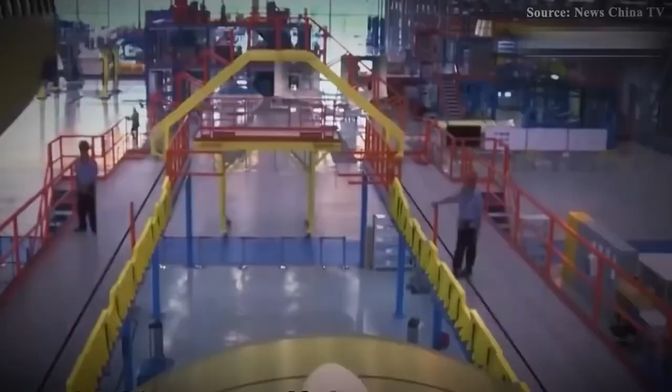For years, the Western aviation industry bet that China would never cross the technical threshold required to build a next-generation turbofan engine. The CJ1000A data is challenging that bet, not through some flashy launch event, not through a claim that it has beaten the LEAP, but through something much harder to argue with. Thousands of accumulated flight hours, stable performance, and steady progress. The latest test results do not create a headline saying, China has surpassed the West. They create something far more difficult to deal with. An engine core that is working, stable thrust, clean response, and flight hours stacking up in the right direction.

Nobody can say for sure how long it will take for the CJ1000A to qualify for commercial service. But the more important question now is no longer, can China do it? It is this. When China finishes the current version and begins developing the next generation, which is likely already being built in secret, what will the aviation world look like then?